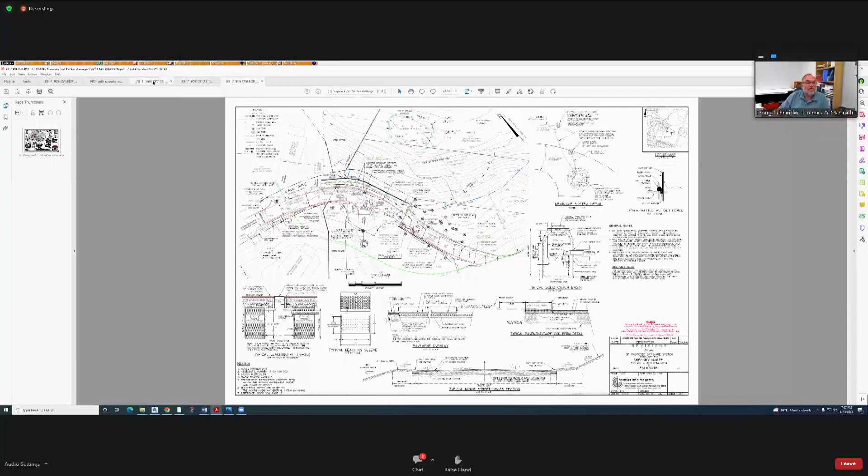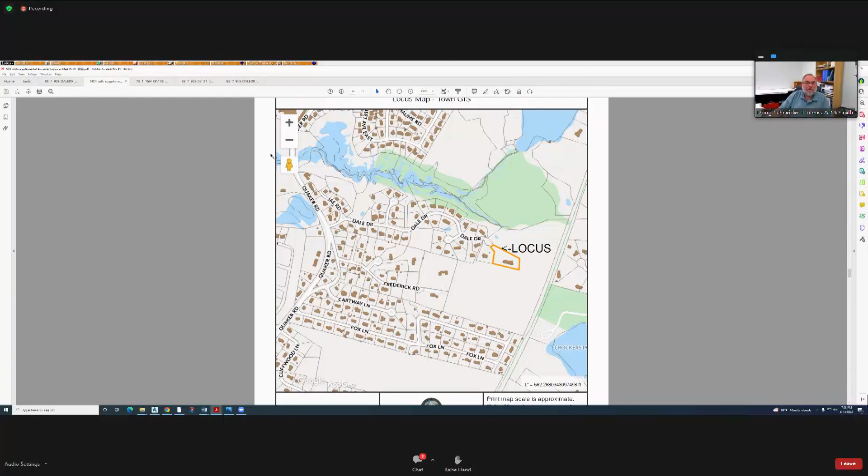This project is located, like I said, at the end of Dale Drive. With the locus map, you can see where Dale Drive comes off of Quaker Road. The subdivision where our lots are dates back about 20 years. Going back to the plan, the extension of the Hammerhead area was built about 20 years ago as a gravel extension of Dale Drive. The pavement ends 100 odd feet before the Hammerhead.

The commission permitted the driveway for Mr. Hartel a few years back under a notice of intent that allowed the driveway that extends straight off of Dale Drive to be paved. My understanding is that order of conditions has since expired. But construction of the driveway and the house has been ongoing for several years. They would like to pave the gravel drive from where the pavement ends, in front of the Dunphy House property, out onto Mr. Hartel's property and up to his house. There's also another paved driveway that extends to the west off the Hammerhead.

The resource areas: there is a vernal pool just to the northeast of the roadway that throws off a buffer zone. There's also a coastal bank because of the river in the back with a FEMA flood zone, and you have the Falmouth 100-foot buffer zone shown in green coming off the coastal bank. So all of the work is within the buffer zone. There's a constructed retaining wall along the edge, and a bit of a shoulder buffer area off the existing gravel that'll remain.

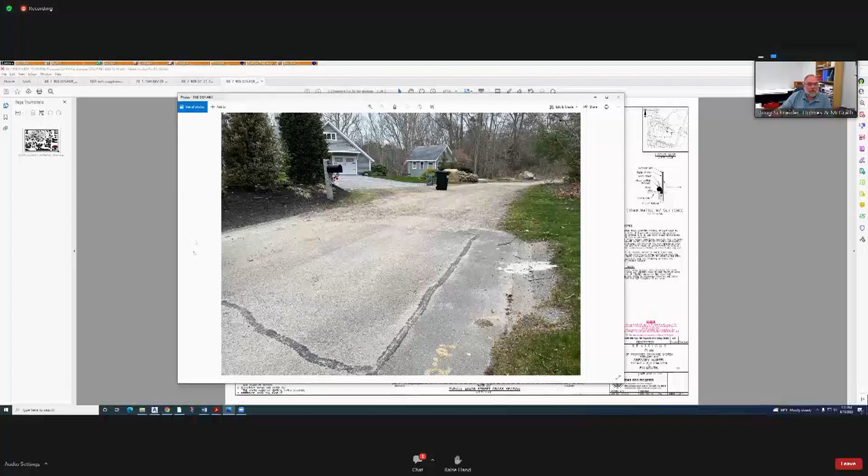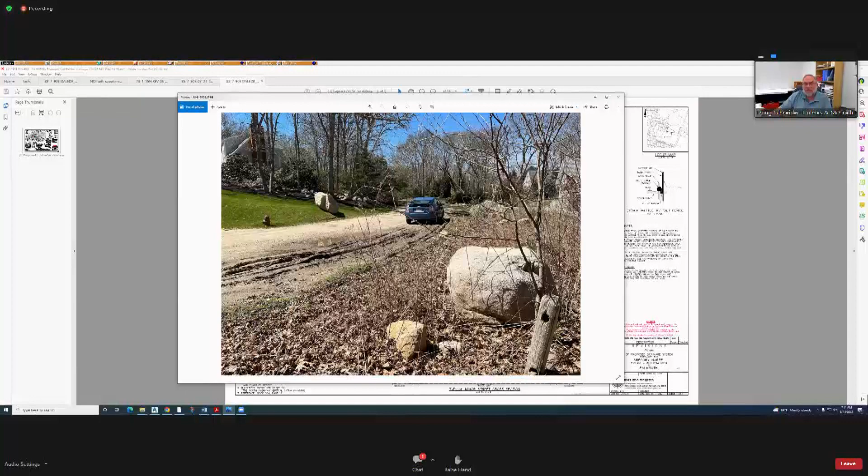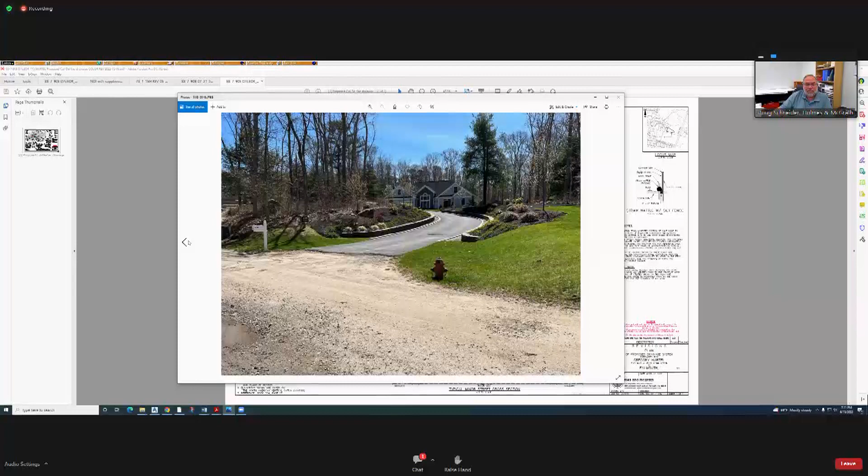This is the driveway that goes off to the northwest. We would be paving right up to that driveway. And this is a view looking up Mr. Hartel's driveway towards his house that's under construction. So we'd be paving in the existing gravel area. It'd actually be a little smaller than the gravel traveled area is now, giving it a more defined area.

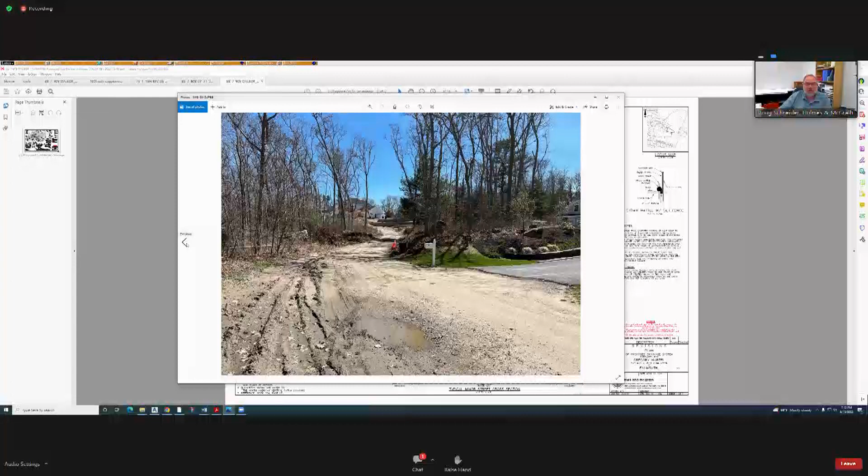Just another view. And then this is looking more from Mr. Hartel's driveway, looking down Dale Drive. And you can see the area on the right of the picture there. The retaining wall is just off the side, so there maintains a nice little buffer between what would be the pavement and the retaining wall.

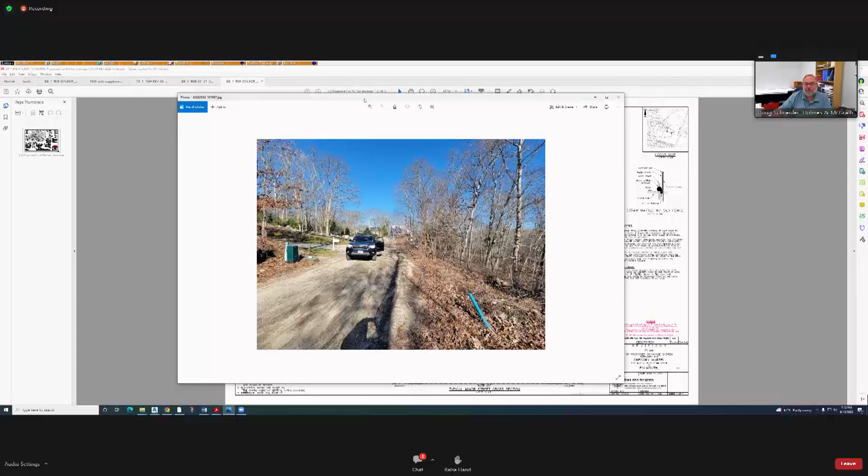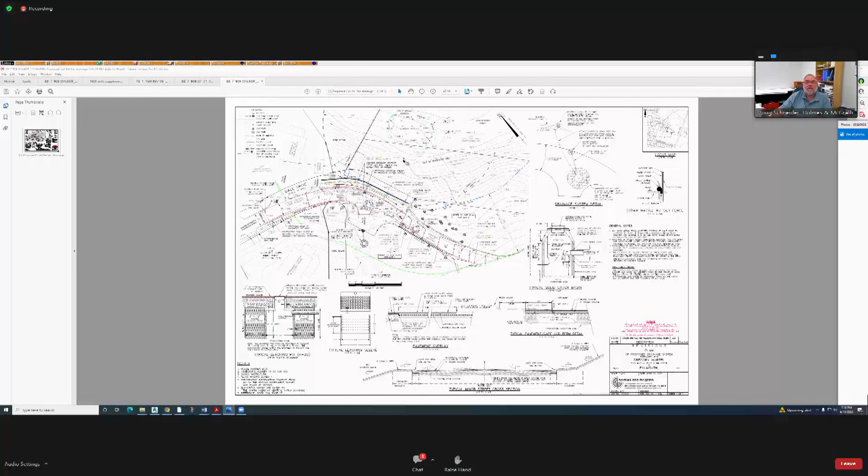We do call for limit of work on the plan for the hay bale, straw wattles and silt fence along the limit of work, up basically at the top of the retaining wall. And we're looking for approval from the commission to proceed with paving this area. And I will stop sharing.

Thank you, sir. Jen? Yes, Mr. Chairman. Mr. Schneider is a little new to this project, I think. So we've been struggling with this area for a while now. It's even before this past winter and fall, when we had some pretty heavy rains. We've gone down that slope towards that vernal pool multiple times to see the runoff from this area.

And I just think there's no other way to protect that vernal pool other than to pave this area. It's been a problem for a while. So staff fully supports paving with the appropriate drainage to try to further protect that vernal pool. I don't know if Alyssa has anything to add. Alyssa, have you gone down that slope? I know Kevin's been down there, and I think even Brendan was down there. I haven't been down. And I have no other comments. Thank you. Thank you.

All right, commissioner comments, questions, Betsy? I was glad to see you had our town engineering staff look at it also. It's fine. It'll be good to have this done. Okay. And Courtney's not in yet. Kevin? I would tend to agree with Betsy. Maury? I think it's long overdue.

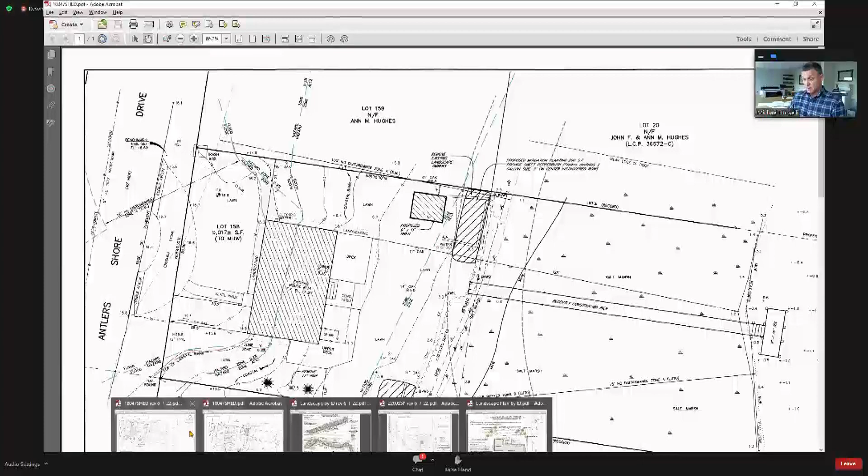We received comments from staff and feedback from commissioners at the last hearing, and we made revisions to the plan as a result. To refresh your memory, I have the original plan here, which was basically for a proposed shed in this location. There was a determination that this wasn't in accordance with the regulations because it's closer to the wetland resource than the closest portion of the existing primary structure. So we went back to the drawing board and revised the plan. And this is the revised plan.

We made the shed smaller. We shifted it back, so it's actually towards the front of the house. Instead of 99 square feet, it's 84 square feet, measuring 7 by 12. We had to pick either the top of the slope or the bottom of the slope to make this work, so we moved it up to the top of the slope. The doorway to the shed will be right at the top of this little grass coastal bank slope. This was the access where they walked around the building. It's a flatter grassy slope than the other side.

This is steeper. So in order to gain access around the house, they want to put some landscape steps to ease the slope and make it easier to walk down. It gets a little slippery when the grass is wet. There were 2 staff comments. We had not accurately shown the walkway here. It had been adjusted and turned, so we measured that and added it.

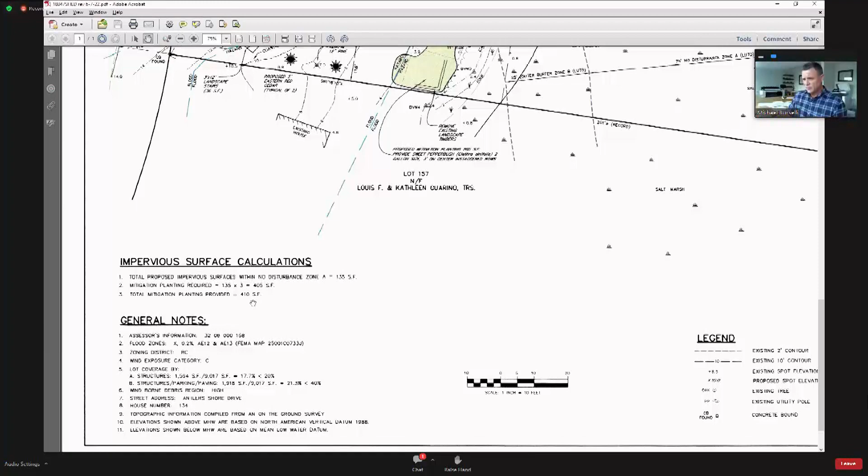He had rebuilt the deck in the same footprint. We did not show these steps that were built. There's 3 1-foot by 5-foot steps here. We measured those last week. They don't go closer than the closest part of the existing structure, but we accounted for those. There's 15 square feet, 84 square feet here, and 30 square feet there, all subject to a 3-to-1 mitigation. When you do the math, it's 135 feet, applied a factor of 3 is 405, and we're proposing 410: 205 in this green area and 205 in this green area.

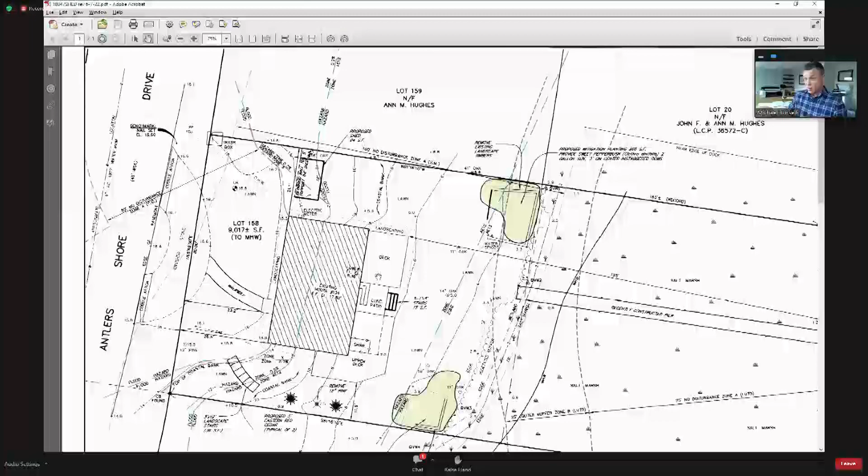I think that sums it up. There was 1 staff comment that we neglected to show this tree had been removed, so I can submit a revised plan showing that. Also, this isn't a concrete patio. He put decking on top of the concrete patio, so I can take the words concrete patio off and it's all 1 deck. I hope that satisfies the commission, and I'm hoping you'll allow me to make these labeling changes and we can close the hearing. I'm happy to answer any questions. Thanks, Mike.

Jen? Excuse me. I don't have any questions. The only comment I'll give you, Mike, is we'll let you know the number of shrubs for both those little blob areas, okay? Yeah, I'm sure Mr. Sperry wants to reach out to you and talk about that. He wants to get the shrubs before the wholesale nursery closes, and he hopes to get them in the ground as soon as possible. Okay, we'll help him out with a count. That'd be great. Thank you.

Okay, no worries. Anything to add, Alyssa? Nothing to add. All right. Commissioner comments, Kevin? No comments, Mr. Chairman. Okay. Maury? Just the oak by the shed will be protected. Am I correct, Mike? Yes. Okay, that's all. Thank you. No questions, thank you. Peter? Thank you, Mike, for dealing with the client and getting it in accordance with the Falmouth regulations. You're welcome. Steve? No questions. Thank you. All right. Betsy? Oh, looks good. Thanks, Mike. Thanks, Jamie.

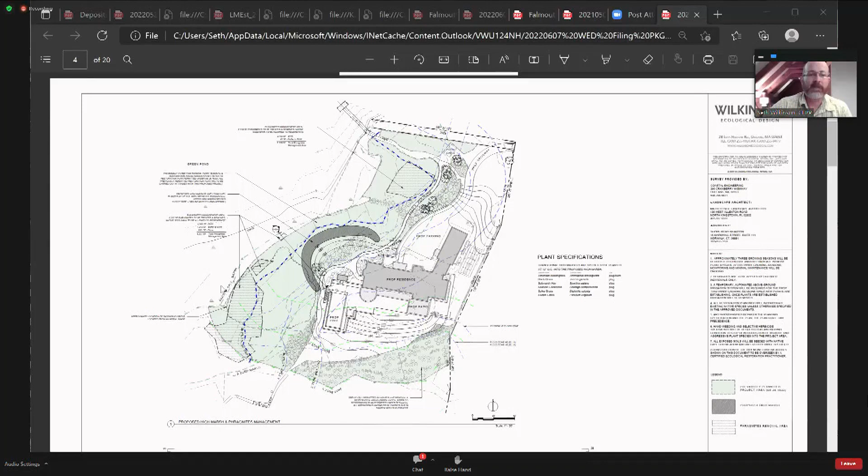So just zooming in a little bit. Initially, so here's this crescent shape of the marsh, tying into existing contours at either end, and providing some long-term flooding protection to this corner of the house, which is the lowest elevation. You can see my cursor, right? Yes. Initially we were sweeping around almost twice the length and coming in like this. But to do that would have involved going into that sassafras grove, which while it doesn't look great, is still alive. So we've completely pulled around that, and this basically goes right along the edge of the limit of work for those that saw it initially flagged out.

So that's the new shape. If you measure this way, it's about half the length. Along the entire length, it's 180 feet, reduced down from 300. So that's just the bird's eye view. We brought in the mitigation from the prior approval. And I would note this is exclusively the mitigation. Everything in green is also committed to be fully restored with the plants that were proposed in the prior program. So the only real planting change is specifically within the crosshatched area, and that's where we would propose to get the marsh established. And then it's really better to look at things in cross section.

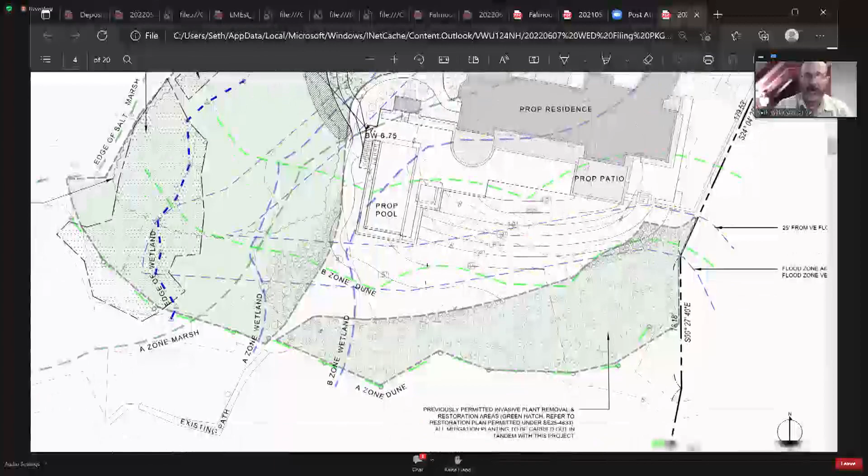And this is directly off of your filing packet. Sorry, I'm not an expert with a mouse, especially on Zoom. So the way that we thought it would be best to graphically represent this is to show you exactly where the marsh is, where it was surveyed on the plan, straight from the survey, and that's shown here, and that's kind of in gray. It's a little hard to see.

We then took a very conservative approach and we're trying to rationalize where really would the marsh ideally be growing right now if it could migrate more quickly. The whole premise of this project is we know salt marshes can't migrate quickly enough to keep up with sea level rise. That's one of the reasons we're so concerned with sea level rise. And so when we're designing a salt marsh, we always elevate 9 to 12 inches. And that's not just Wilkinson Ecological, that's just about any experienced firm that does this type of work.

And that's to accommodate for the sea level rise which has already occurred, as well as the fact that young salt marsh plantings of the same species don't have the same tolerance of salinity and inundation period that an established decades-old marsh community with really expansive roots has. So rather than elevating at 9 or 12 inches, we wanted to be conservative and just elevate it at 6 inches. And then we showed how that vertical rise relates horizontally, because this is really about horizontal movement.

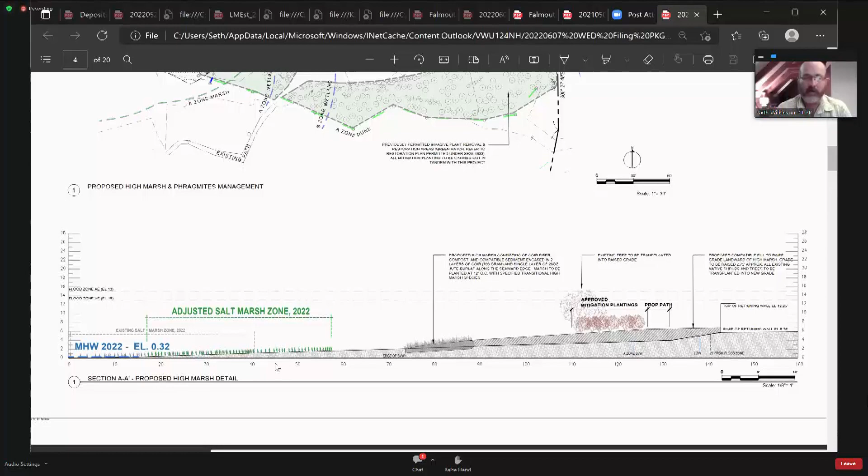So if we accommodated for the 6-inch rise that we know that marsh would really prefer to be growing in, it's tolerating growing in longer inundation periods now. What that would translate to on a horizontal is where this is shown in green. So ideally, the marsh would be probably about 17 feet further landward if conditions were perfect and if sea level rise was still moving forward at what we saw in the last century, rather than the accelerated rate we've been seeing in this one.

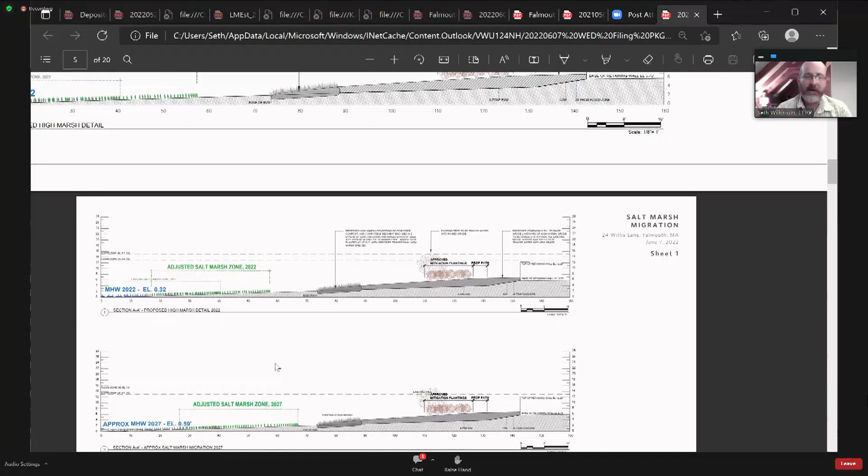Then what we started to do, again, this is just a graphic projection. The only thing I can tell you is, like any projection, it's guaranteed to not be exactly right, but it is directly correlated to the NOAA study because I feel that's the best, most recent information that we have. It's more current than the most recent IPCC, Intergovernmental Panel on Climate Change. So we projected that just 5 years ahead. Here we see the marsh starting to migrate. This is where we would expect ideal marsh conditions to be in 2027.

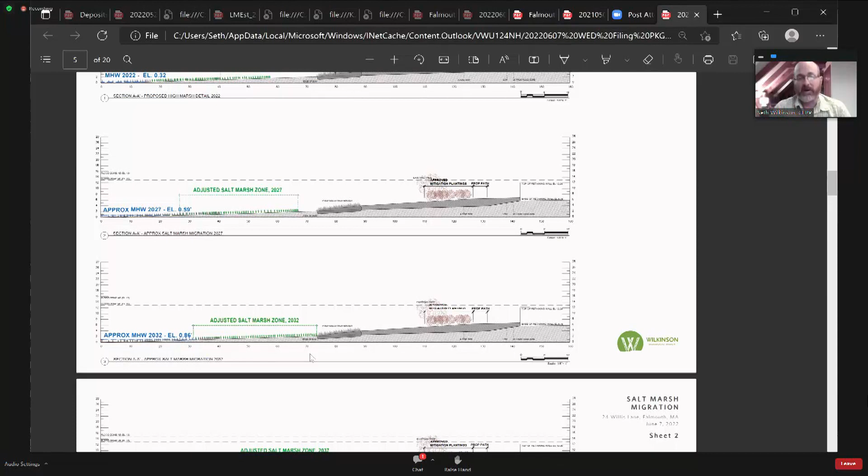Now here's where the existing marsh ends there. In 2027, I can tell you it will not be all the way up here. It may wish to, if plants could wish. That's where the ideal plant growing conditions would be from an inundation period and salinity perspective, but it probably will have migrated a little bit, but almost imperceptibly, unfortunately, is what we've been seeing. And then we'll continue to see that 10 years from now. 10 years from now, it'll be just about where we are proposing to begin this essentially simulated peat bed and marsh planting project.

And so basically in year 11 is when those ideal conditions intersect with this marsh. And I think that's a decent amount of time. If sea level rise ends up being a little slower, which I think we're all hoping for, then say the marsh has 15 years to develop its roots, even better, great. But I do think 10 years is sufficient. That's a pretty long time for root development for marsh species.

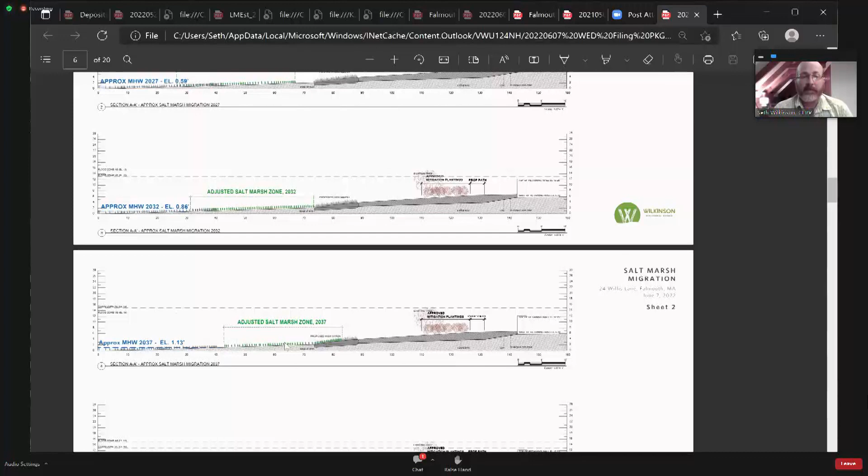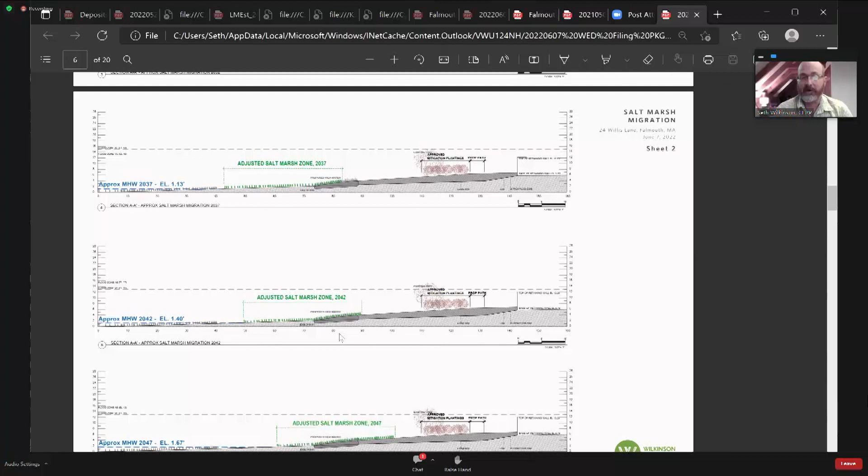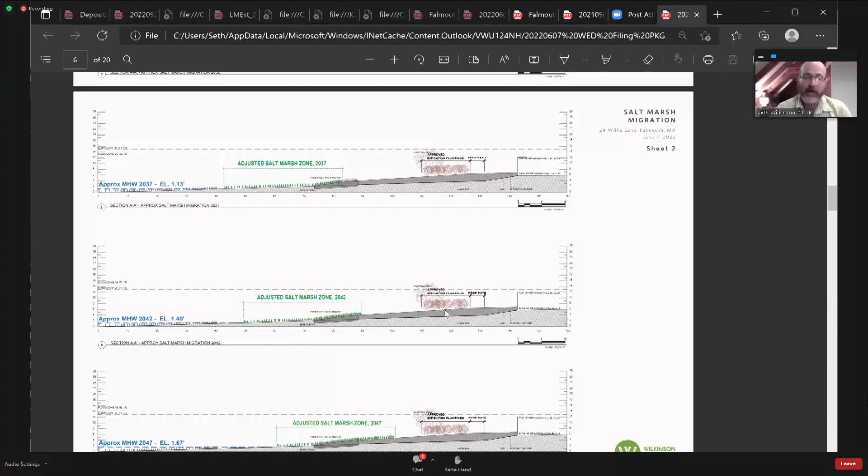And just sort of moving forward in our little time machine, 2037, more than half of this area will be colonized. And by 2042, the entire area would be ideal marsh growing conditions. And now it's even extending further landward. And I would have much higher comfort level with the areas landward of this simulated peat bed supporting marsh migration, because we've placed this at the lowest possible grade that we can, as Greg noted in his report. We've brought as much fill out of there as we can. So we have this nice level runway, which is another thing that salt marshes really like.

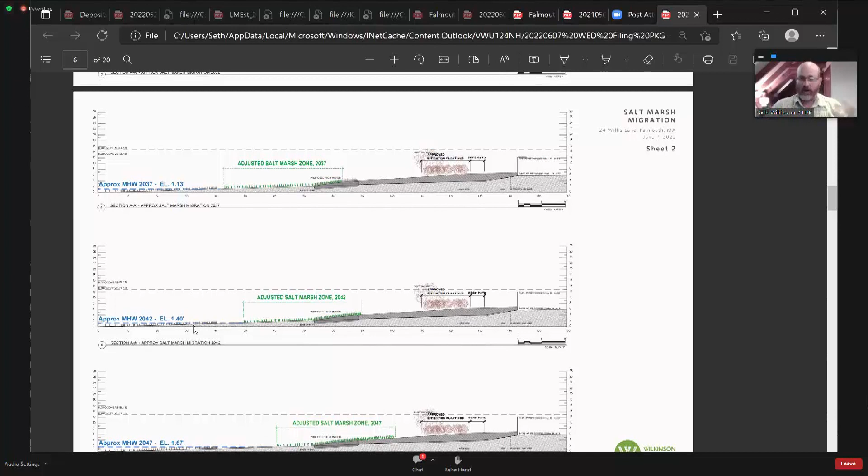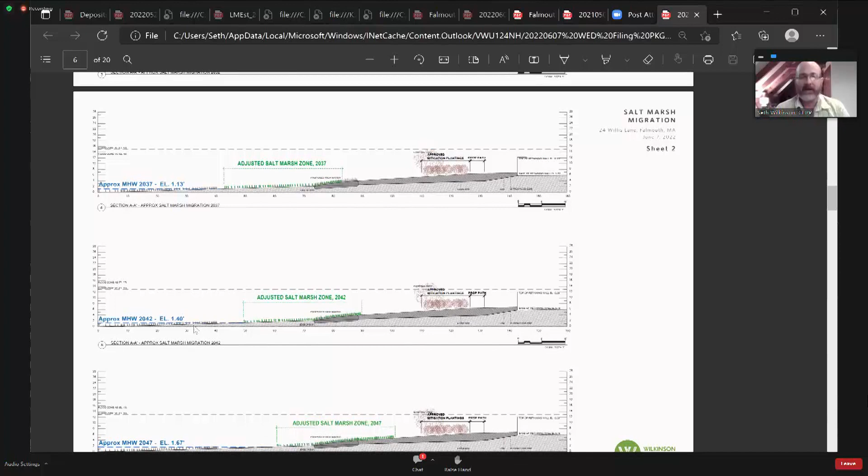But they'll have a wonderful fibrous, dense rooting medium from which to spread, rather than a drowned, degraded area that's already trying to tolerate too much inundation period. That's one of the reasons: it takes a lot of energy for a marsh to move. And if it's already struggling from having far too much salt water sitting on top of it, then it's not going to be able to use the energy it needs to migrate. This is really providing a head start for those plants.

And so then again, by 2047, projecting out, which is about the extent of the report. The report went out to 2050. And again, based on NOAA, they're anticipating roughly a foot and a half, a tenth of a foot less than a foot and a half, of sea level rise potentially by 2050.

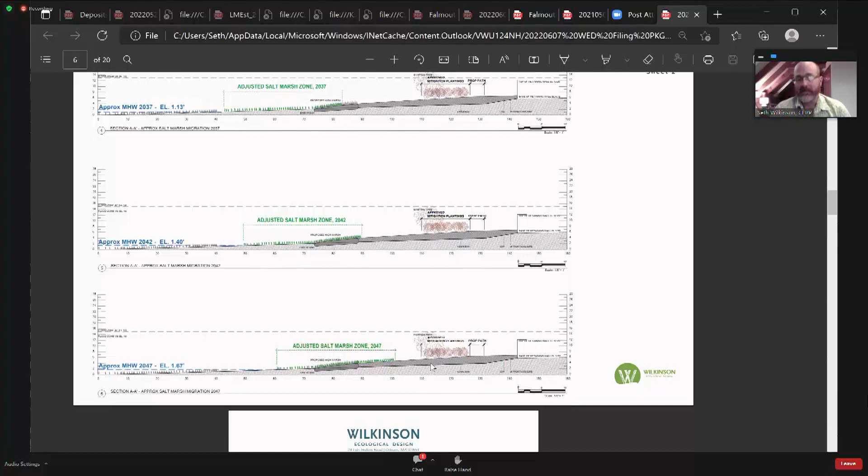And again, I think this site would be well suited for that, if that were the case, because it would have this great rooting system. And then, through all these, I should have pointed out earlier, but here's where the mitigation plants have been proposed since the last approval. That's not changed at all. We're proposing to keep that exactly the same, just to be able to plant them at a little bit higher elevation than originally proposed.

So thank you again for that cue, Jen. I can leave this up if there's questions. I'm happy to speak to it. Jen? Yes, 1 second, Mr. Chairman. So I think it would be easier if you took the plan down. Sure. Yeah. If they want to look at it again, that's fine.

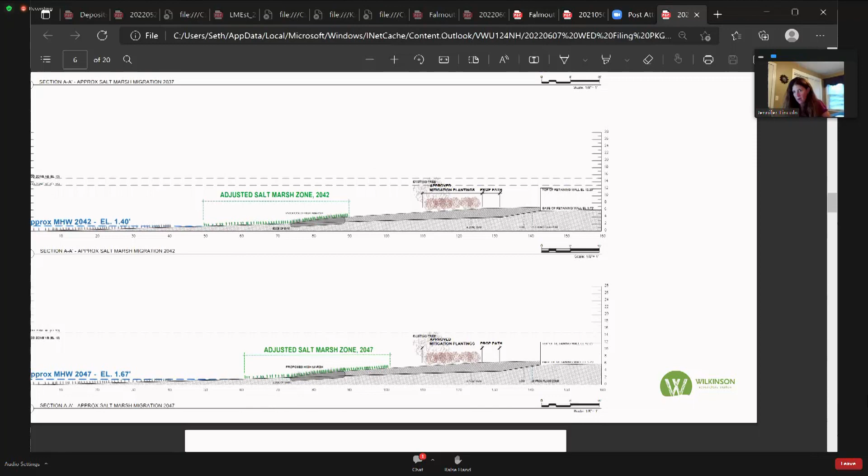Just a couple of things, just to clarify for the commission, all the cobble is removed from this project. So your base is going to consist of what? The coir fiber rolls? Yes, it would be roughly equal parts of compatible sediment, same sediment that's there presently, an organic compost to provide food and the right bacteria and fungal inoculants for a healthy marsh, and then just loose, completely natural coconut fiber. The loose coconut fiber, essentially the material that they stuff into fiber rolls. I'm sure you've all seen fiber rolls.

We just break open, or usually they get broken up in shipping, and then we set them aside and use them for marsh projects. If you think about that fibrous husk from the coconut, that is the closest natural product that we have to simulate the dead roots, which are a significant component in a peat bed. So peat is primarily comprised of sediment, living plant roots, and dead, very slowly biodegrading root mats. And so the coir is meant to provide those long fibers that are commonly found in marsh from slowly decaying root material.

And it's landward of the BVW. I know that was a question that kept coming up. It's landward of the BVW, so this system is not going to be in the BVW. Absolutely, yeah. It comes close in a couple of locations, but it definitely does not intersect. Okay. And all of the existing veg, you're just gonna pick up and drop back down, as well as put the mitigation that was originally proposed in this location, that's gonna go right on top. Yes. Okay.

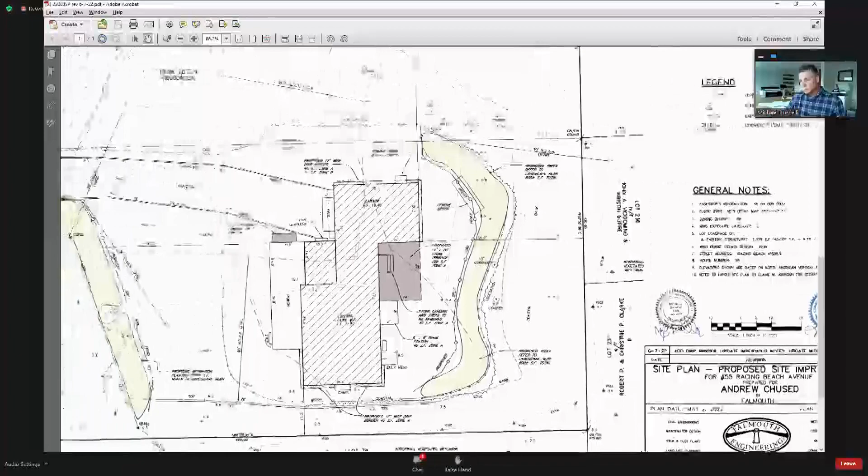And the mitigation planting requirement, when you do the calculation, resulted in a need for 1,193, and we're proposing 1,300, a little bit more than 100 square feet extra. And in addition to wanting those revisions, you wanted a more detailed landscape plan. The shape of these green areas, which are the proposed mitigation, are changed. We added a single rail, split rail fence on the edge of the mitigation to discourage mowing.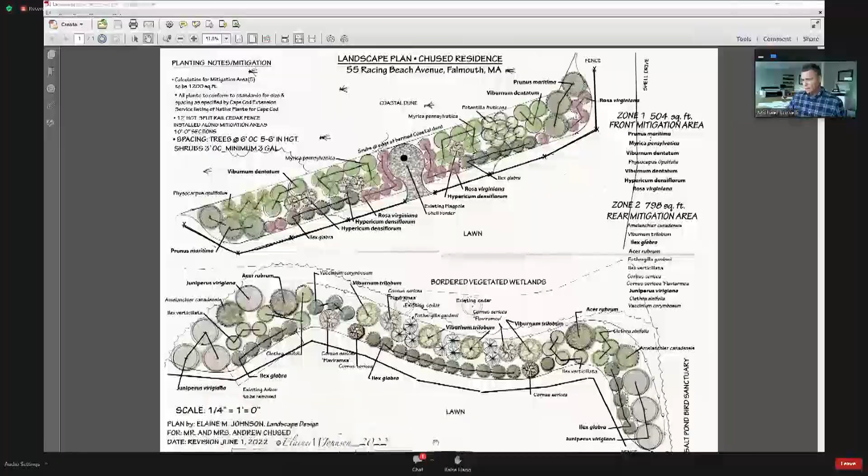And I don't really have anything more to add except one comment about a question about this lattice panel. This one lattice panel, we would like to keep it because it would be placed right here directly behind the house, and it would block this AC unit. That's its only purpose. And I'm here to answer any questions, and if there's questions for Elaine, she's available as well. All right, thank you.

Jen? Elaine, there's something else you have to do on your computer because I keep trying to promote your other. I've got two of you. I know. How do I do that? That I cannot help you with. I don't either. There I am. There you are. There you go. Okay. All right. Good evening.

Do you have anything to add to that? No, I just wanted to follow through on the great recommendation that Jen made last time, because I hadn't even considered dividing these two plantings into two areas. And I'm happy with her suggestion because the front planting is in a very extreme exposed site right there off Buzzards Bay. Racing Beach is right along, of course, the beach. And fortunately, there is a nice coastal dune and bank that serves somewhat as a berm to mitigate the force of the wind and the salt spray.

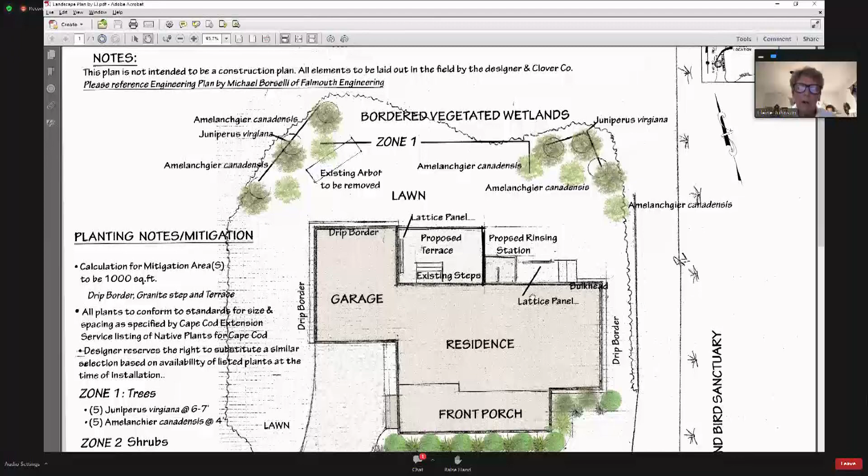Yes, Mr. Chairman. I think the only comment that Alyssa had was is the lattice still proposed, Elaine? Yeah, the lattice panel is a freestanding panel that's right off the foundation of the house, basically to screen a very, very unattractive mini split air conditioning heating unit. Why it was constructed to be such an eyesore right on the side of their house, I have no clue. But I figured we could do a nice lattice panel there just to screen it. Right here. Yeah. The drawing shows it a little further away than it actually would be. It would be very close to the foundation of the house, Jen. To screen this air conditioning unit.

Yeah. That air conditioning unit is just this big blob. I don't know the proper terminology for it, on the wall of the house. And then there are conduits that go up the side of the house. I've never quite seen anything like it, but it's there. I can assure you, neither have I. When we saw it, we were like, huh. What is this? Yeah. Okay, thank you, Elaine. Anything to add, Alyssa? Nothing at this time. Thank you. Thank you. Pat?

The lattice screen would be in a velocity zone, correct? I believe it. Yeah. Why not use vegetative screening?

We need something to support it. I'm not sure what you... I just thought that the footprint of the lattice panel is the most unobtrusive thing in that location next to the shower enclosure. It's a very nice looking architectural feature. We certainly can plant a nice vine to go up the panel. It'll be perfect for support.

It's a Walpole product. It's very attractive, but it's also very, very sturdy. The posts are 5.5 by 5.5, and it's a nice open 5-inch horizontal vertical lattice.